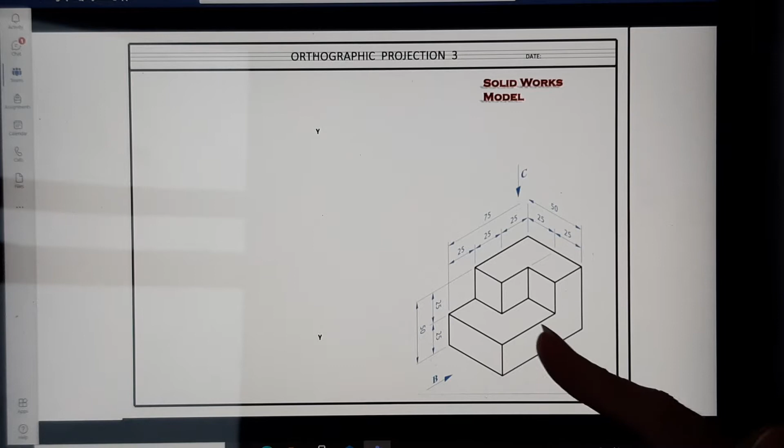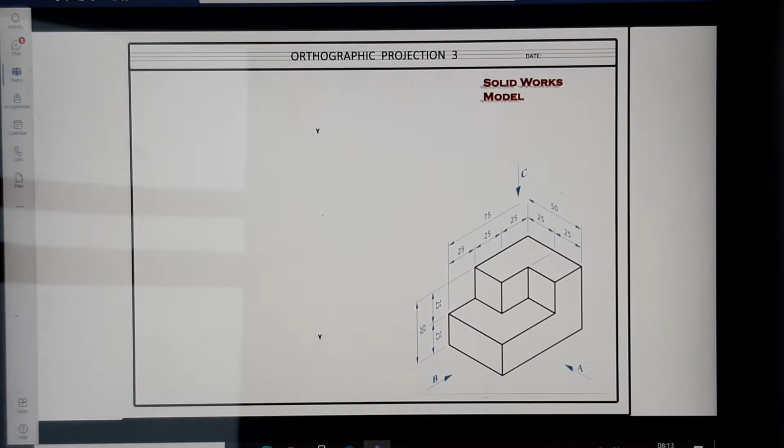So the question you had was this one here, and I'm just going to zoom in on the measurements. So A is pointing left, so it's going to go on the left hand side of your sheet. B is pointing to the right hand side, so it means it's going to go on the right hand side of the page. And C is the plan, and it always goes underneath the elevation, which is A, so it's going to go on the left hand side of the page underneath.

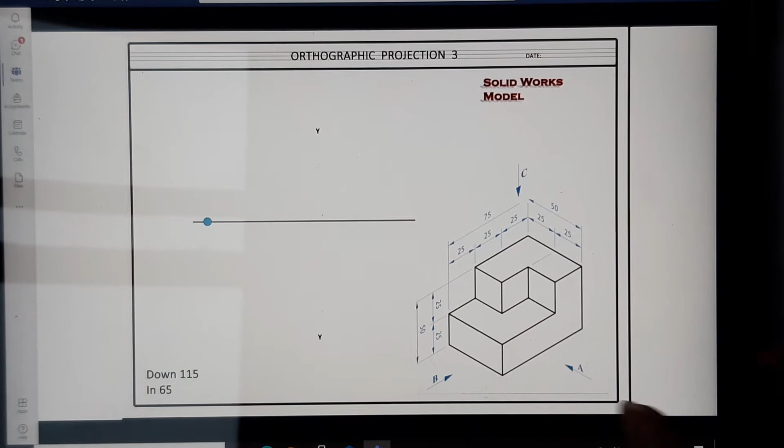Okay, so just to start you off, you always start with an XY line, the ground line. The width of A is 75, and as you can see, it's split up into 25, 25, 25, so that's what we want to do next. So 75 wide, measure 3 25s, sorry, it's 50 high as well, and that's 2 25s. And as I was saying, there's 3 25s spaced within the 75.

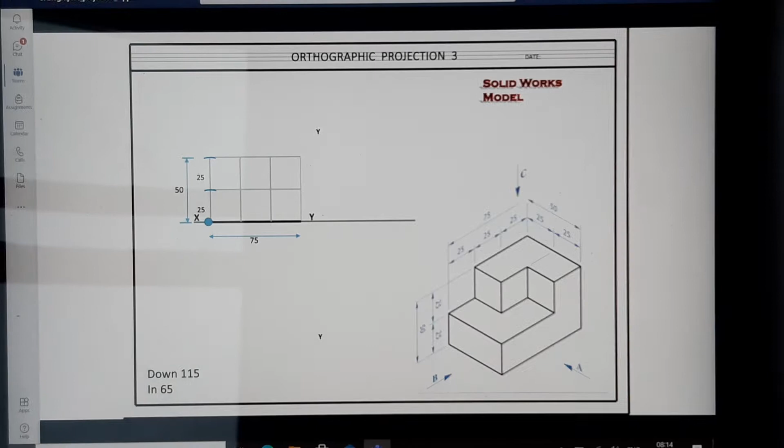So you can see your grid coming into focus. You can see there's a bit of an L block, and then there's an individual block on its own. You should see that in your grid, the L block and the block on its own. You can start putting that in heavy. Okay, so that is the elevation complete.

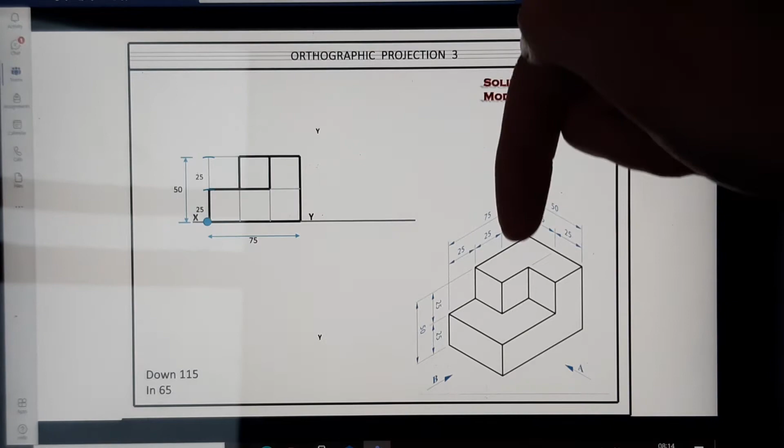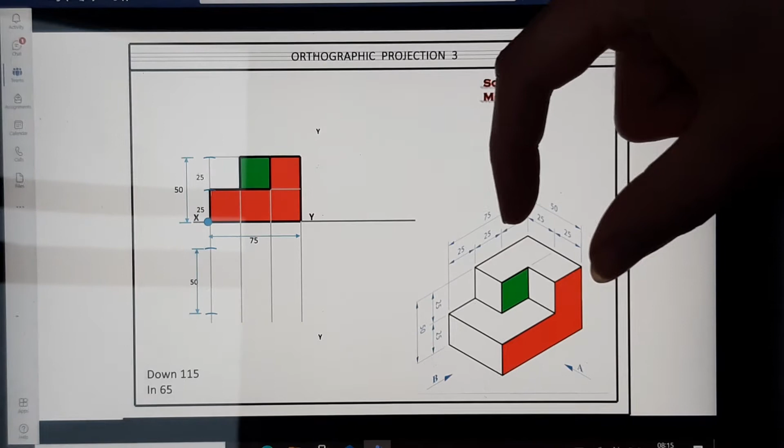We're now going to do the plan, which is looking down, and we're going to transfer all of our widths down along the page. Okay, sorry, that's just the colour scheme of it, so you can see where everything comes from. Transfer all of your widths down along the page. Leave a little bit of a gap in between your elevation and plan. Okay, and as you can see from the plan, when you look down, the width of the plan is 50, and it's split up into 25 and 25.

Bring those lines across. Okay, and you see your grid again, and you can see I have two little L blocks, one in this direction and one in the opposite direction. You should see them here, one L block upside down and one normal L block. You can start putting in heavy what needs to be heavy now. Okay, you should see the two different L blocks. And again, I've color coded it just for you to see what shapes I'm talking about.

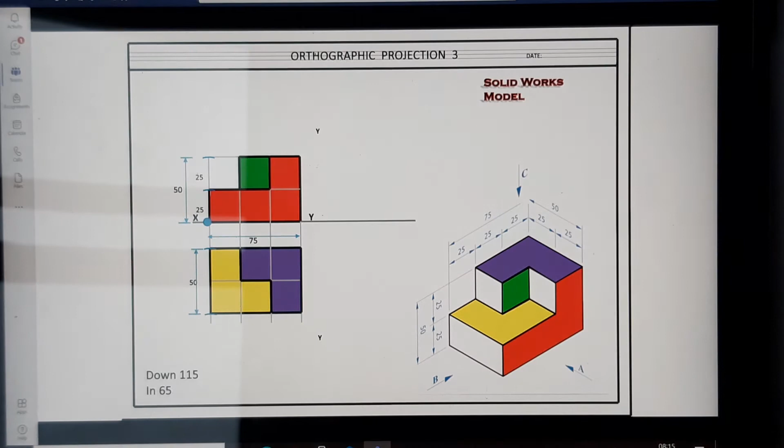The last thing you're going to do is an end view, and that's looking in the direction of B. And as you can see, it's a long rectangle on the bottom and then two squares. And to transfer your points, these two base points here, I know they're going to leave a gap, but you don't need to. You can bring the points up at 45 degrees. Now just watch, they are going to leave a little bit of a gap. You don't need to leave that gap.

They're transferring those 3 points out to the edge. You don't need to do that. You can just bring them directly from here up at 45 degrees. There's 3 of them until they touch the ground line. So you might need to extend your XY line a little bit longer. And you're going to bring everything across from your elevation and transfer your heights up.

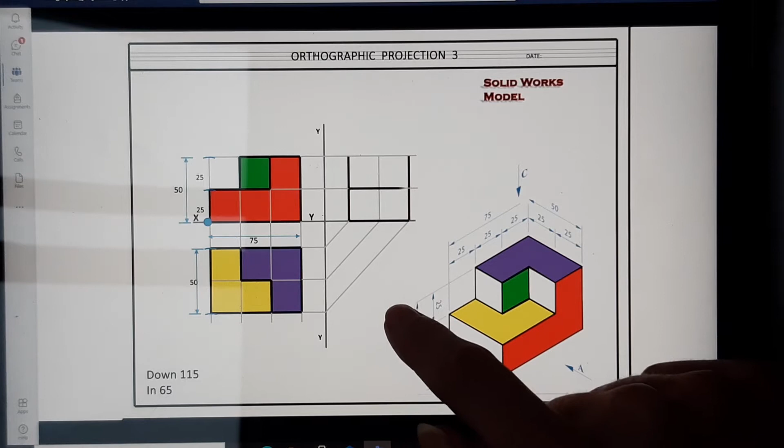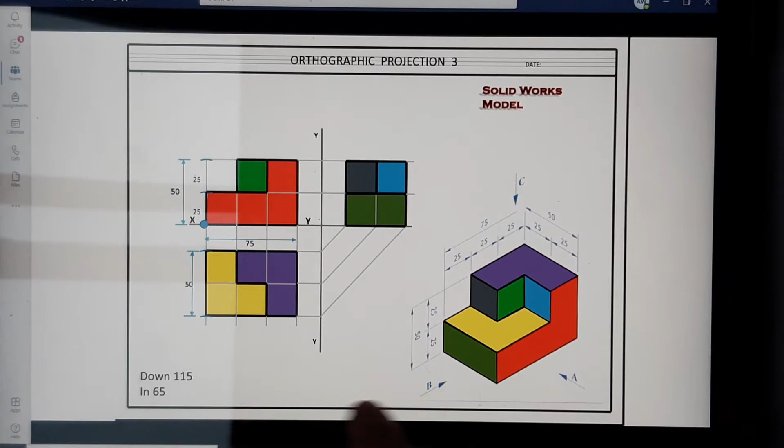Okay, color coding again. Okay, so on the bottom is that green rectangle, on the top is the blue square and the black square. That was your question for today done. I'm now going to introduce you to a new question, and there's a new little bit of learning in it. So just correct your question from Tuesday.

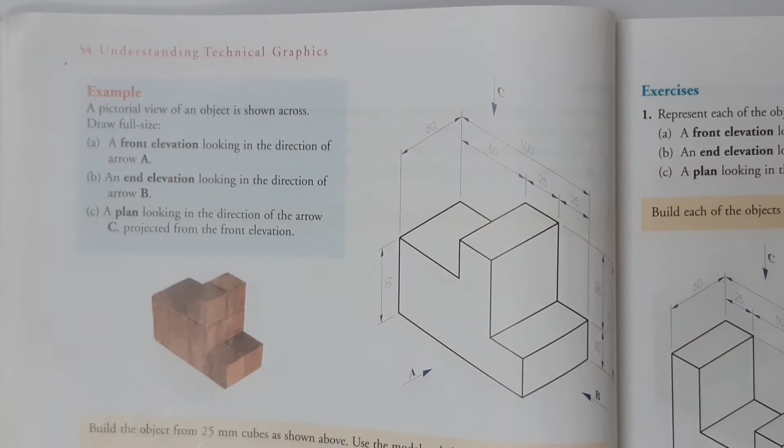And the question we're going to look at today is this one here. Okay, we're asked to do the elevation in the direction of A, B in the end view, and C for the plan. Now this is a little bit trickier than the first couple of questions. There's a new thing that I'm going to introduce you to, and it's known as a hidden detail line. But the difference is A is pointing right, so A needs to go on the right hand side of the page. B is pointing left, so B is going to go on the left hand side of the page. And C, the plan, always goes underneath A.

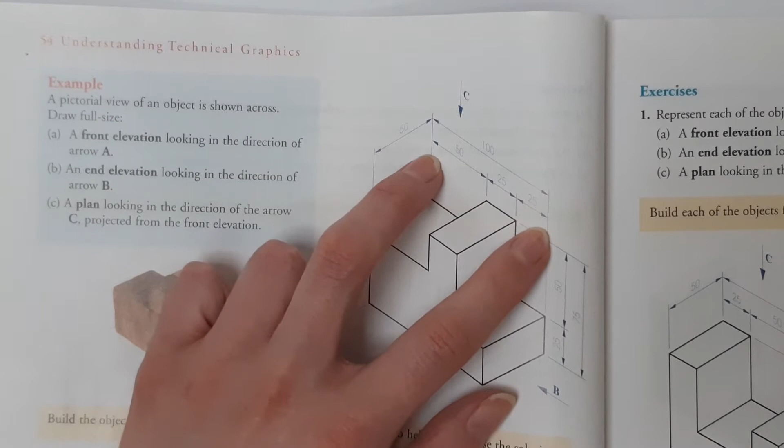I am taking the measurements directly from this, so it's 100 out, 50, 25 and 25. It's also 75 high. There's a height of 25, there's a height of 50, and there's a height of 50 on top as well. Okay, I'm just going to zoom out so you can see the page in full.

And as I was saying to you, middle of your page, draw your XY line. We're keeping this to the right hand side of the page. So grabbing your set squares, and all you're going to do now is just make sure you have 100 on the right hand side of your page. Keep it to the right. So I'm measuring that 100. And as I said, that 100 was split up into 50, 25 and 25.

With all of those, you're going to draw vertical lines, and you're going to do this with your light 2H pencil. Okay, so vertical lines for each one. And continue them on down along your page. So your first one for 0, the second one for 50, then the two 25s.

Now the heights, as I was explaining, it's an overall height of 75, so it can't be bigger than 75. So measure the 75, and then I said there was a 25, and that's the 50 on top, but there was a 50 from the ground up as well, so we need to put in that as well. So it's essentially three 25s. We're going to carry those lines across the page, and as I'm doing them, I'm going to bring them all the way across my page from start.

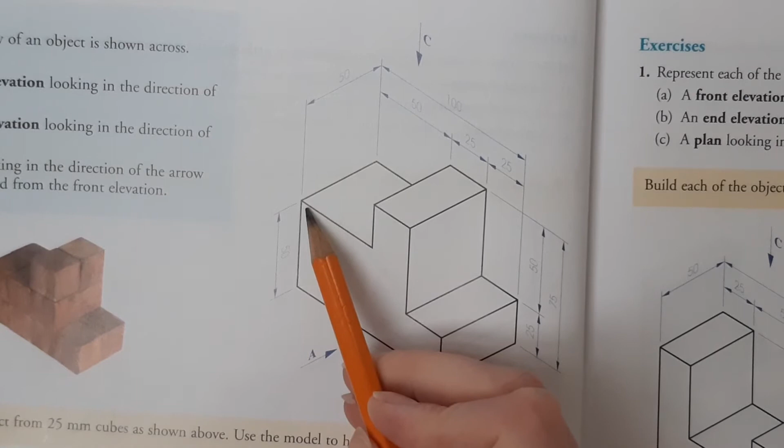Okay, so at the minute I have my grid for my elevation. I'm just going to bring it back to the question. I'm going to zoom in. Okay, so when we're looking at this shape, you can see it's high at the back for 50, it comes over for 50, up 25, back down. Okay, and there's that little step in front. Just going to zoom back out now.

Okay, so we should be able to put in heavy what we can actually see now, and that's what I'm just going to do. So, starting left to right, it's up for 50 at the back. It then is nothing for 50, and then it's up 25 for a width of 25, then it's down for 50, and then it's just 25 on the front.

Okay, working from the top down, so the first horizontal line is only 25 wide, second one is 50 wide, and the third one is 25 at the front. Okay, so basically that is my elevation done.

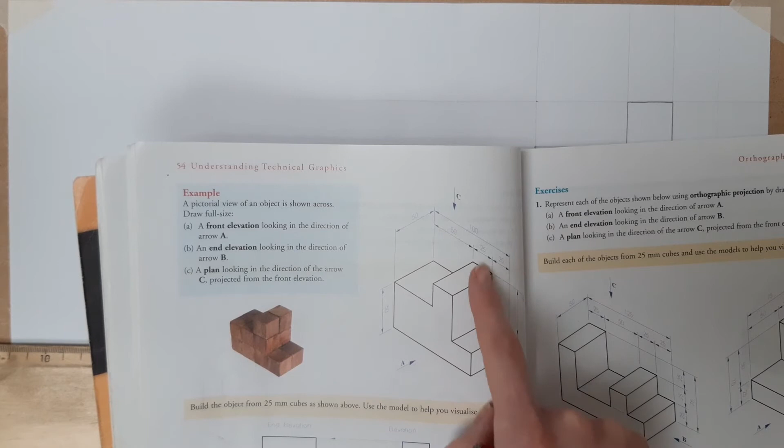Okay, that shape. I'm now going to work on the plan, and as you can see, there's a square, two long rectangles equal width. The plan is 50 wide, and remember you have to leave a gap in between your elevation and your plan. So you don't really need to measure the exact measurement, but just grab your light pencil for a minute, and you're just going to do a light horizontal line. Okay, I've left a gap. The plan is 50 wide.

So measure the 50. And draw the horizontal line. Okay, at this stage you should see your shape coming into focus. So working from left to right, starting to put in your heavy lines. So the 50 block, as I was saying, and then the two rectangles of equal width, 25 and 25.

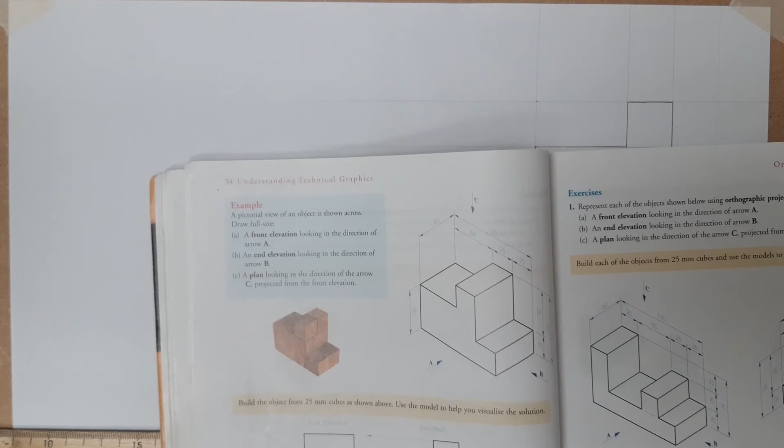Great. Okay, so with the elevation and plan done, the last thing we're going to look at is the end view, and I'm just going to bring it into focus now for a second. So the end view looking in at B. When I look in at B, I can see a rectangle, height 25 in front, and then I can see a box, rectangle or a square, a 50 by 50 box.

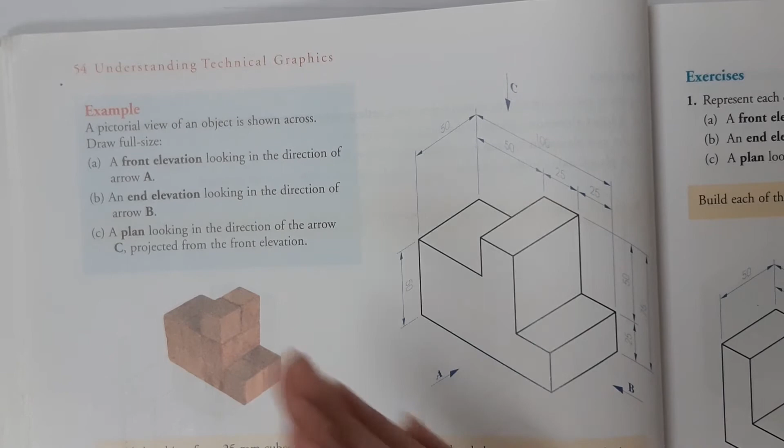Now there is this surface at the back that I can't see, but I know it's from the ground, it's 50 up, and I need to show it as well, but I'll talk about it once we actually start drawing it. Sorry, now I'm going to zoom back out.

Okay. With the 2 points, or any points that are in the plan, we're going to bring them up at an angle of 45 degrees. So just grab your 45 degree set square and transfer those points up at 45 degrees until they touch the XY line. So you should have 2 points there. You're just going to bring those vertically up.

Lightly with your 2H pencil. Drop the 2H pencil for a minute. Now, as I was saying, when we were looking in this direction, we saw that box in front, a rectangle in front, and we saw this square, and I'm just going to put them in heavy, working from left to right. Okay, so the two outside lines are heavy.

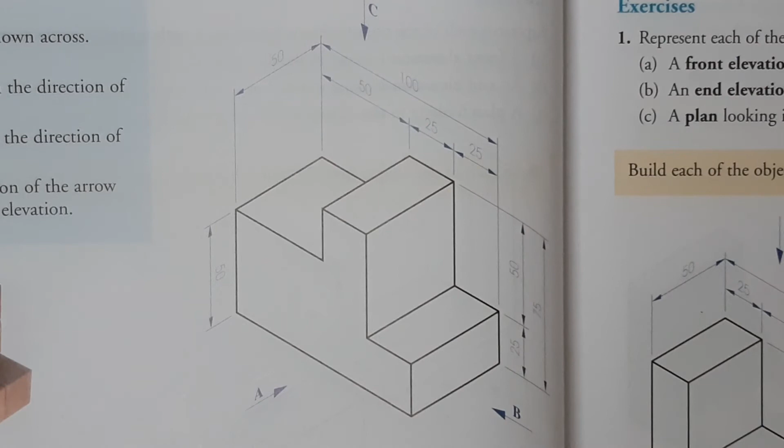And now working from the top down. We have the box that was 50, and then we have the 25 in front. I'll bring you back to the book for a second. Okay, so we have that 25 and we have that 50. Now this is at the back. Now it's there, but when I'm looking in at B, I can't see it straight away, but it is there and I need to show it. It's not going to be a heavy line.

Okay, so you can see in my construction, my grid, I have a line there, but when I look in here, this shape is being blocked by this surface. So I can't see it, so it's not going to be just a heavy line going across. It's a thing called hidden detail. It's a line that's there, but it's been blocked by another surface.

So this line, when I look in this direction, I can't see it because this wall is kind of blocking me, but I need to show it. I need to show its hidden detail, and that is just a dotted line. Little spaces in between and equally spaced afterwards. That's called hidden detail.

You've also looked at fold lines, and fold lines are very different. They're long line, two short lines, long line, two short lines. And it's just making sure that you don't get confused with that. So just to recap, you need to come up at 45 degrees from the plan to the end view. Do your elevation first, and you always follow the direction that the question is going in.

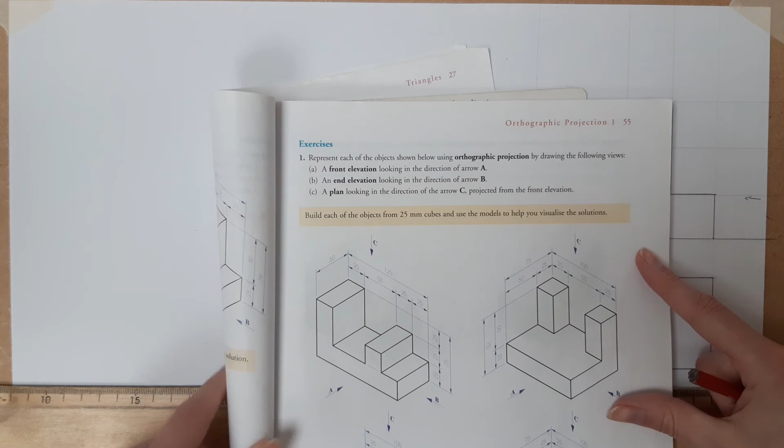I'm going to give you 2 questions today, and these are your 2 questions for today. What you're going to have to do is draw the elevation, the plan, and the end view for each, and there is going to be a hidden detail in it. Again, you're going to follow the direction of A, B, and C. So for the first 3 questions that you did last week, or on Tuesday, A was pointing left, so you put it on the left-hand side of the sheet.

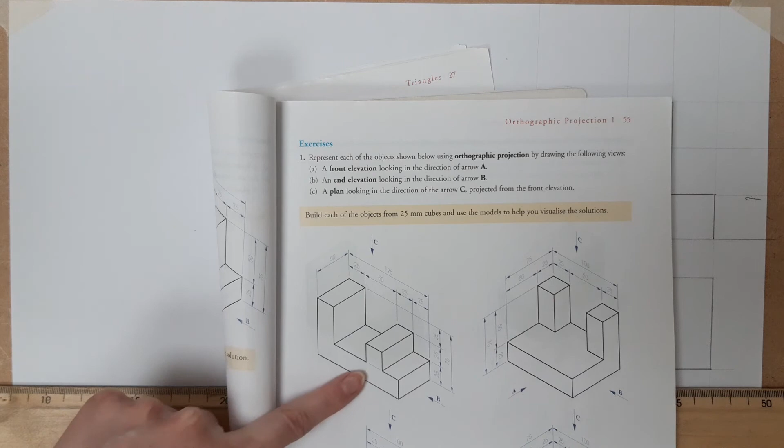You can see A is pointing right, so A needs to go on the right-hand side of the page. So you can see earlier on, with the first question I did, A was pointing right, so I put it on the right-hand side of the page. You can see it here, it's on the right. B is on the left, and then C is underneath.

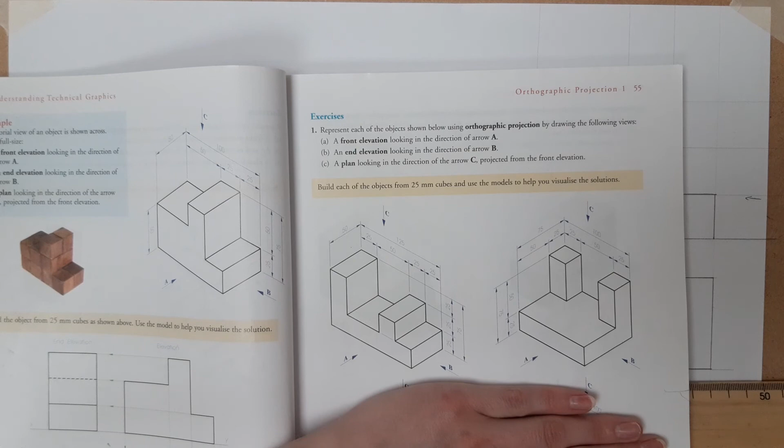I can fit a whole other question on an A3 page, but if you're working on A4, you'll just turn over your sheet. You'll keep A on the right, B on the left, and C underneath in every question that you're going to do today, and that's these 2 questions. Okay, I'm going to upload them as a picture, and you can start into them once you have this one done. So you have to do this one first. This is your example, and it's showing hidden detail.

And don't we always label our drawings, elevation, plan, and end elevation. So I'm just going to do my horizontal line, measure my 4 mil. Sorry, and then that underneath. And now once you've that done, you can label elevation, plan, and end elevation. Capital letters, neatly written. Now we know this is an end elevation, but you can call it end view if you like, just for short.

Okay, so you're going to draw this, you're going to join me live, and then you're going to start doing the 2 questions. If anyone has any questions during that time, you can ask me at that stage.